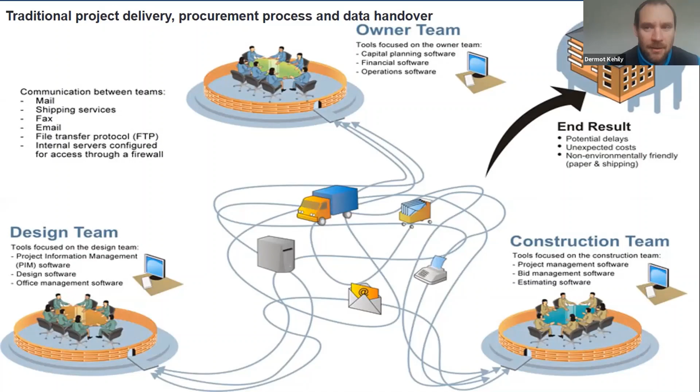So BIM puts a different workflow on that, and I know we talk about BIM as a process. I'm going to focus more on the technology today, but keep in mind that because of all the technologies out there in building information modeling and digitization, there has to be a process that drives it. That could be a topic for another day, in respect to what's possibly coming down the line in Ireland in relation to a level 2 mandate, roadmap, or direction for utilizing BIM in the public sector.

But without the people and the methodology behind it, it really won't be a successful endeavor, it won't be a successful process. So that's for another day - we're going to focus on the 5D aspect of building information modeling, and that is cost, and 4D, of course, being time.

So again, another statistic I like to throw up, even for my students, is looking at the construction industry - and I'm not an economist - from a productivity point of view. I don't know the ins and outs of how these metrics are put together, but from a productivity point of view, and this is a US metric, the construction industry is underperforming compared to other industries. We used to do okay - I suppose what this is saying is that over time, at least since the 1960s, we're not being as competitive as we should be, not as productive or efficient. So whether BIM is the answer to that, I don't know, but it could help.

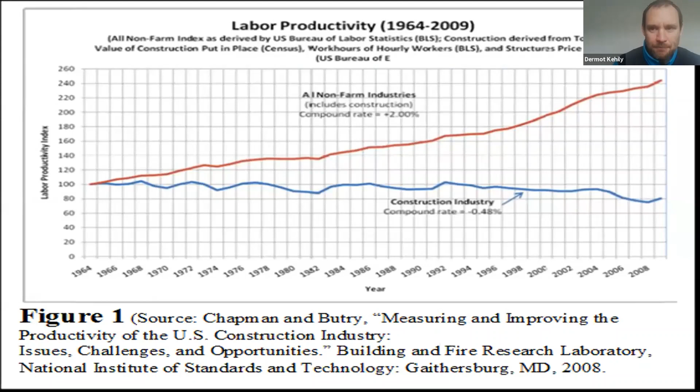We're on the very early tentative stages of it, so we'll see what happens. But it certainly is a more collaborative, inclusive way of working, and the procurement systems in relation to building information modeling will possibly have to change to include that collaborative environment. But again, that's something that will be worked out in due course.

So route into QS, why are we worried about building information modeling? Well, Noel, our chairman in the SCSI BIM QS working group, does a good foreword in the document about why we should be working in BIM, or thinking about BIM, thinking about digitization.

I always ask this question to my students. I do a little poll: do you think in 2 years' time you're going to be measuring from 2D drawings still? I get a certain proportion saying yes or no. Then, do you think in 5 years' time you will? Do you actually think in 10 years' time you're going to be doing what you do right now with your 2D drawings, in terms of either manual takeoff or on-screen takeoff, with all the technology available in the world? And it just depends when.

It's not if anymore, it's when. So I just want you to think about that. That's a big question to answer, but I think it's coming whether we like it or not. Just like you can't argue about climate change anymore - it's just there, the facts and the science are behind it. We're going to have to get on board here. All the other disciplines have. We're just lagging behind a little bit.

I know that's a bit controversial, but all the statistics and research, being an academic, prove that as QSs, we're not as up to speed as the rest of the construction industry and the rest of the disciplines are.

So the document looks at 5D BIM, 4D BIM, pays a little bit more attention to what you actually do with your model from a mapping and processing perspective, and I'll explain that in a second. I did it last year, or last August. I'll go into a little bit more detail, or if you've forgotten, give you a quick reboot on it.

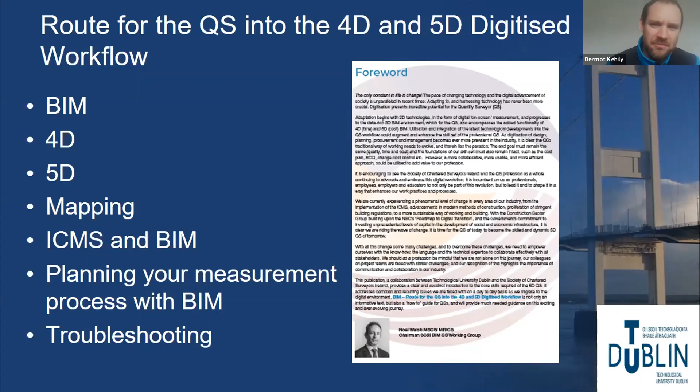Dip your toes in the water, get a model, have a look at it. If you're just using it for visualization purposes, that's a first step. Then maybe when you're a little bit more comfortable with that, do a quick takeoff - the quick automated thing I call a BIM dump, it's my own word but it's a good analogy. Extract the quantity, see what can be used, what can't be used, what you're comfortable with, what you're not comfortable with. Go at your own pace. And that's essentially what this document is all about.

So from a BIM perspective, what do we see, but what is underpinning it all? I don't want to focus too much on this because it could be another number of CPD events. You've got the BIM deliverables and your dimensions, be it thermal analysis, scheduling, cost, time, whatever it is. And then you've got all the requirements underpinning building information modeling - your ISO 19650, your PAS documents, your whole level 2 documentation, CIC protocol, etc. It goes on and on. There's a whole other world of study to be done on that side of things.

But I suppose what we think, or at least what I think you think when you think of BIM, is you're thinking of visualization, maybe more automated quantities, drawings being a little bit more coordinated than they are, you're thinking of hardware, software, training - and that's essentially what I thought probably 10 years ago when I was getting a little bit more interested in this.

Understanding BIM is about understanding information, and that's what it's all about. Don't get put off or sidetracked by how pretty the drawing looks or how pretty the 3D visualization of that particular drawing looks. It's really the information in the drawing, and the information is disseminated in a completely different way than what we're used to in terms of drawings and specifications.

So we can see on the left-hand side here, this would be a CAD drawing of a wall. And realistically, from a CAD perspective, it just points to the actual materials, tells us what they are, and we're quite comfortable with that. And we assign a description to that quantification, and off we go and get our contractors the price. Building information modeling is a whole lot more. It's an object that has a load of information in it. So you can see it visually.

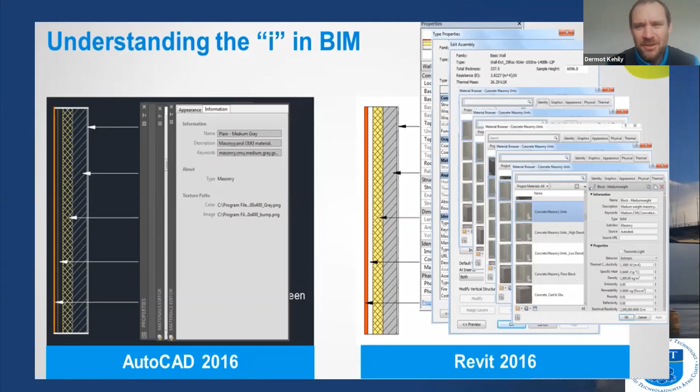So moving on from that, the dimensions, I'll run through these quite quickly because I'm sure they've been dealt with before. 3D is obviously our architectural three-dimensional version of the model. And that would obviously include your structural and your building services information. And from a BIM perspective, that could be the federated model, the composite model, the combination of the design disciplines in one model. Now, at the moment, we're not really there. We're not getting full federated models. We're still getting individual models, if we are getting models at all. But that's what 3D is.

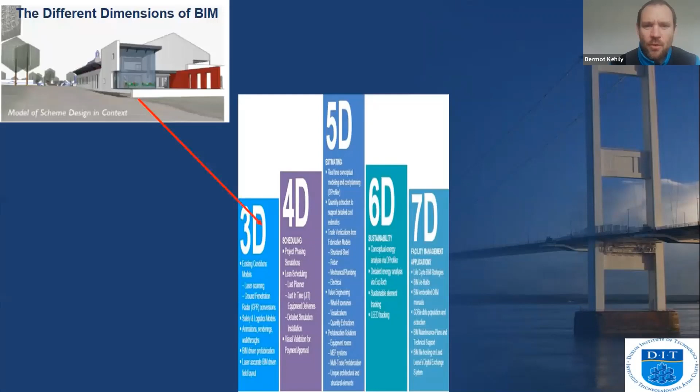4D is the focus on time, and that's a focus on utilizing BIM for space management, scheduling, clash detection. And in fact, that was where it all kind of started in the US. The contractors used to take the 2D information and BIM it up into a 3D model and start finding where the issues are in those drawings. And it was a way for them to work through a lot of change orders and stick in a lot of requests for information in that regard, and possibly make a bit more money on change orders. But from a utilization point of view, I think it's a very powerful part of BIM.

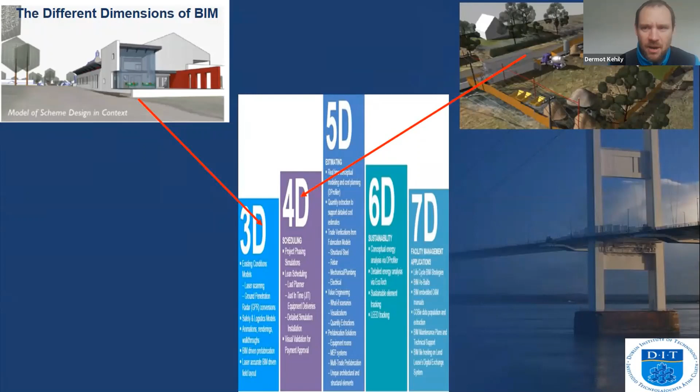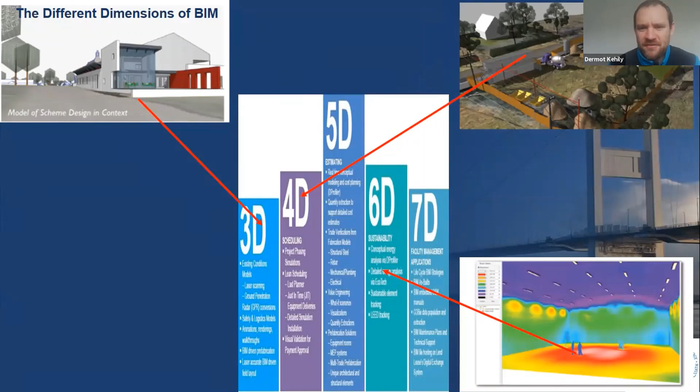The 5D is what we're going to look at today. Sorry, I jumped 5D onto 6D, which is your sustainability, your thermal energy modeling, your energy efficiency. Your 5D, which I'm going to talk about briefly today, and your 7D, which is your life cycle, your operational phase of the building. And that's the real power of building information modeling.

And that's why building information modeling in the UK back in 2010, 2011 was pushed as a tool for public sector procurement, because what the public sector want is essentially an asset information model. They want that digital twin, and they want to utilize it in the operational phase. They don't really worry too much what you do in your design and construction phase. But they want the product of that.

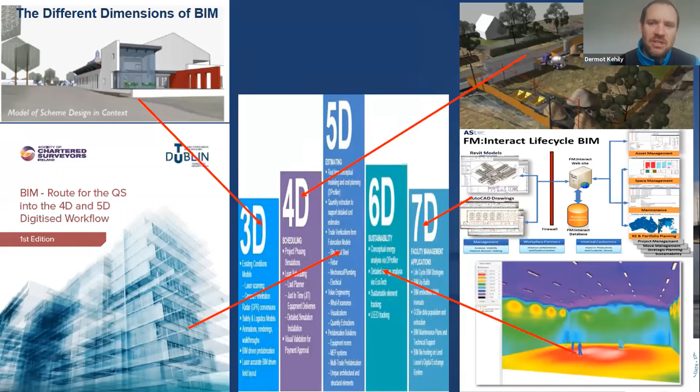What they got before was a bit chaotic, and we can all probably agree on that. A lot of the time, the client walks into that building for the first time and doesn't necessarily get what they want, what they envisaged. But certainly from an asset point of view, they're getting the physical asset and they're getting the digital asset, and they can utilize that much better in terms of operation.

So BIM is a visual database, and from a QS perspective, you'll hear words from me like processing, mapping, coding. So there's new terminology there. There's other words, mining, filtering. And what it means, essentially, we're going about our quantification, our measurement, our cost planning and bills of quantities production in a slightly different way.

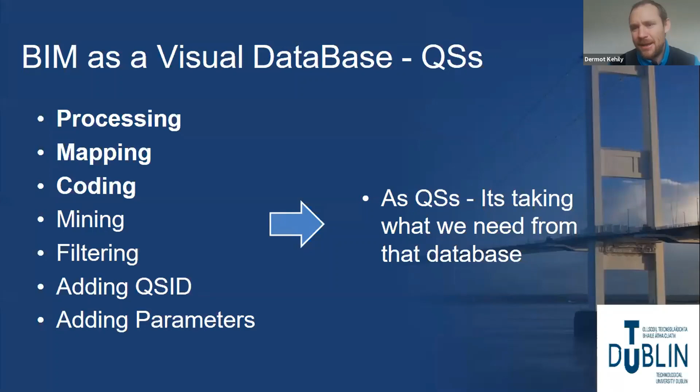It's not about the manufacture of information of quantities. It's about the actual reading of that information that's already there. And it's about being comfortable with it. It's about validating it. And it's about utilizing it in a way that we can present in the same way to our client, be it a cost plan in an NRM format or a bill of quantities in our ARM format.

So what are we doing from a processing mapping perspective? And the document goes through this. We're changing the structure of the model from an output that is in line with the authoring model, the design software. It could be in Revit, and it has the Revit hierarchy structure to it, category, family, and type, into a quantification and a measurement that aligns to our classification systems, be it National Standard Building Elements, the International Construction Measurement Standard, or even ARM4, although it's a bit contentious how applicable ARM, that level of detail, is to building information modeling, but we'll briefly discuss that in a second.

So mapping and processing, again, don't worry too much about this. You'll read it for yourself in the information paper. All I really want to get through today is that processing, from a terminology perspective, is where we maybe utilize, see, I have a QSID and that information there on the right-hand side. So this column of information is supposed to simulate what might be a wall. In this case, a rendered 215 concrete block.

So the wall, of course, visually you'll see it in the model, but from an object point of view, from a data point of view, you'll see a lot more information than I'm showing on the right-hand side of your screen there. And in that information could be a QSID. Now, who's going to put that in there? I always get that from colleagues of mine or friends I went to college with. I'm not going into the architectural software and sticking in a code so that I can take off my quantity. That'll take me forever. And plus, I'm not paying Autodesk a license to just do that one thing. Well, you can do it in what is pre-processing.

You do it in the model, and it's worth having a somewhat working knowledge of ArchiCAD or Revit, but it's not needed. You can still do it in your cost software. So be it in your Cubit, or your CostX, or you're utilizing BIM Vision or QB or whatever your software is, you can actually do your filtering there. Or you don't have to do it at all. You can output your quantities automatically and see what you can use in your traditional way of producing cost plans and bills of quantities. So just be familiar with those two concepts.

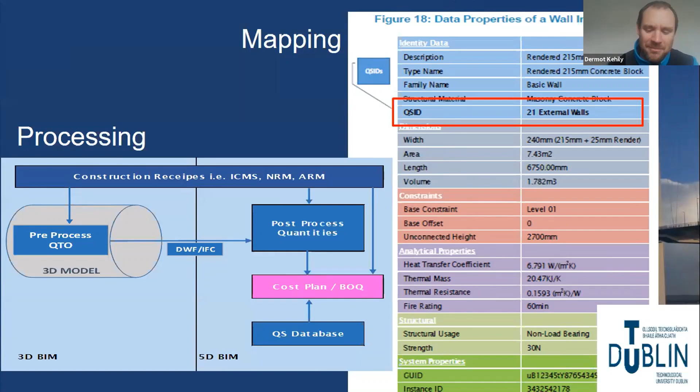The documentation explains processing and mapping. Processing being the coding part, and then mapping is changing it into what we need from a National Standard Building Elements perspective. So we can do it a number of different ways, and I wrote this part of the document myself. I tried to explain it very simply to the layperson, as an old supervisor of mine used to say, so the intellectual 14-year-old can understand it. That's the focus here, to make it simple and not technology orientated. So I'm not saying use CostX, use Cubit, use this particular software. I'm saying that they all have similarities in the way they do these things. That's quite different to what you're used to in terms of on-screen measurement.

So I go back to what I was saying earlier about this BIM dump. There is some software, and CostX is one of those, where you can actually press that BIM red button and out pops a load of quantities. It'll quantify the entire model, but only what's in the model. So if it's an early model, there won't be a whole lot. If it's a detailed model, it'll be quite a bit. And a lot of those quantities are very usable, especially counts and areas and wall areas, etc. But you just have to be careful using it verbatim in your quantification.

And what it does is it quantifies, and you can see here on the right-hand side, it'll take the hierarchy structure of the Revit model it's coming out of, or an IFC model, which is an interoperable file, and it'll quantify based on that schema, that structure, not any sort of National Standard Building Elements or ICMS structure. Now, that structure is devised in such a way that is quite similar to our elemental structure. So just be aware of that. This can be very beneficial, just pressing that BIM red button and seeing what you get out.

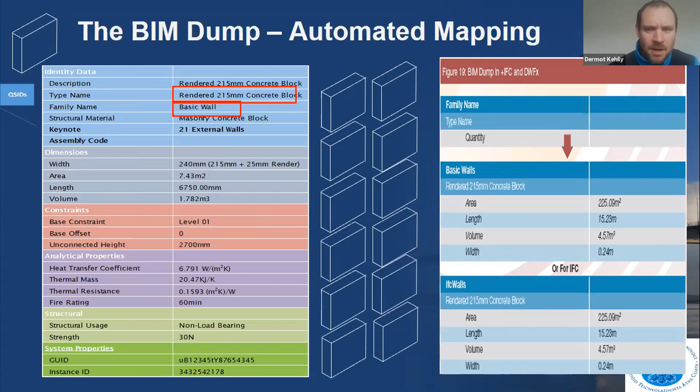Now, not all software can do that. And that would be the start of your BIM process, I think, whereby if you have software that can do that, do it. See what quantities come out, especially your counts, your M&E stuff, your light bulb counts, your door counts, your sanitary fittings counts. Huge advantages in a big model, a big building, just pressing the button and getting those counts.

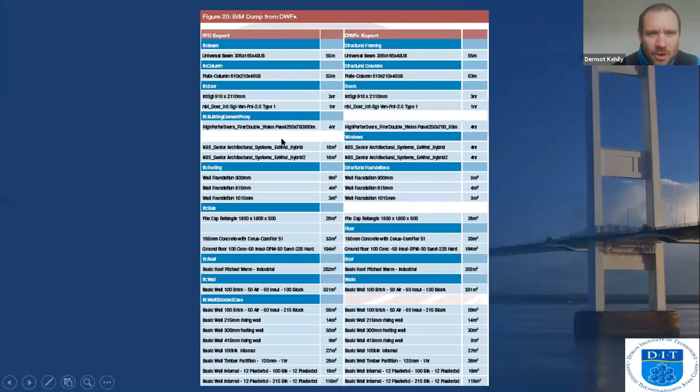Okay, so you can see, maybe you can't, it's pretty blurry, and apologies for that, it's a pretty blurry drawing. On the left-hand side is an export from IFC. That's the open BIM format. Again, I know this terminology might be a bit new to you guys. Have a look at the document that explains what they are. It's an automated export from IFC on the left-hand side.

On the right-hand side, it's an automated export from DWFX, which is the interoperable file from Autodesk. Now, it's mainly used for collaboration across Autodesk products, going from Revit to Navisworks, or Revit to Revit Structure, etc. Whereas the IFC is your pure BIM interoperable file. Supposedly, no matter what software you're working in, if you get an IFC file, you should be able to open that file. It's like a PDF. It's a read-only BIM file format.

And you'll notice that they're quite similar. So if you're working in CubiT, you'll be working on IFC. If you're working in CostX, you'll be able to use DWFX and IFC files. If you're working in BIM Vision, it's IFC files, and most other software, it's the IFC, and the IFC is the future. So just be aware of that.

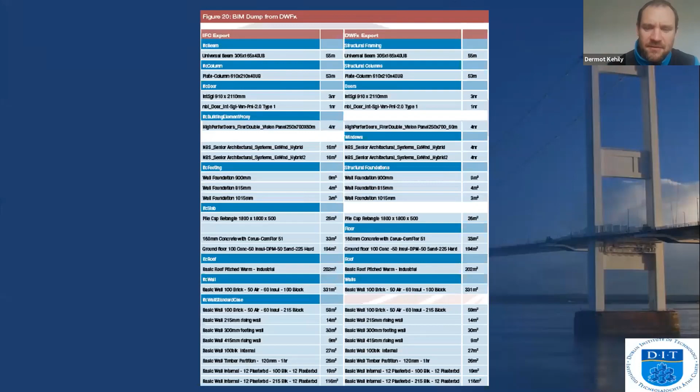From an automation point of view, from a quantity point of view, getting into a little bit more detail, I'll leave it up to you guys to take those steps when the time comes. But you will have the ability to do this mapping. So you might say, I'm going to use the BIM database to say folder name is going to be based on my QSID, and that could be my element 21 external walls. The subfolder name is going to be based on the family name of my Revit object. And then I'm going to combine the description of type name and structural material together to give me a description.

And what happens then is you get a more formulated output. Now, this takes a bit of a progressive step into building information modeling from a quantification point of view, and it's kind of hard to explain in one slide. But if you're taking anything from this presentation in this regard, it gives you the manipulability in the software. And again, most software has a mapping functionality. CubiT has it, CostX has it, and others have it. So it doesn't matter what you have, you'll still be able to take this step.

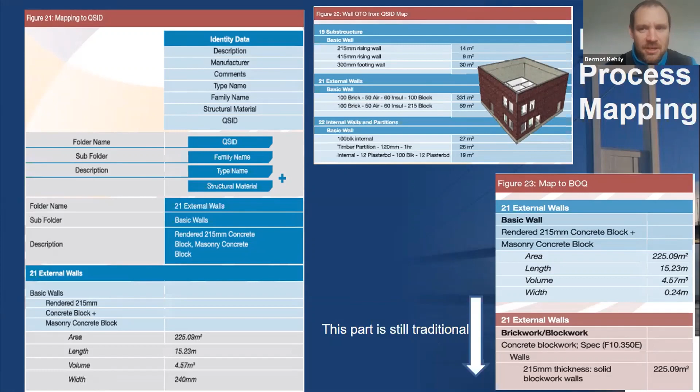And all that doesn't give you an automated quantification that you can utilize straight away in your cost plan. But what it does is it prepares you and gives you a breakdown per the National Standard Building Elements. So then it makes it a lot easier to put it into your traditional cost plan. Now that last part of the process is still quite manual, but the early part in terms of quantification is becoming more automated. We're still on a hybrid approach. You still won't be able to get away from measuring your gross floor area and possibly doing a lot of 2D takeoff, because our measurement rules are still based around that criteria. But just be aware that there are ways of automating your quantities quite quickly.

If the volume dimension isn't there, or I want to check it when it is there, I can multiply length by width by height to see whether it's aligning. Or I can calculate my formwork based on the perimeter of my column times my height. And again, that formwork quantity wouldn't be there. So these are model-derived quantities.

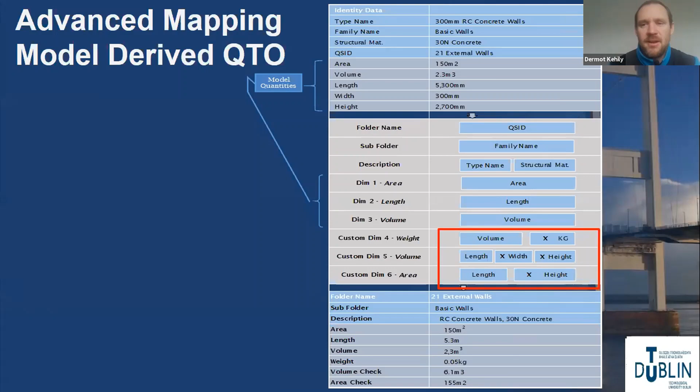Everything isn't going to be in the model, just like everything's not in the drawing, and I have to derive these quantities from a 2D drawing. It's just a different way of doing it. So that's the last stage of really getting into automated mapping. And again, take your incremental steps in that regard, and that might be down the line for you guys. Or if you're already doing automated takeoff from the BIM red button, so to speak, this may be the next step for you.

Rory's not here. Unfortunately, he couldn't make it. Rory was the author that looked at 4D, and it's beyond my expertise, a little bit, in that regard, and maybe that's saying something for a quantity surveyor. Not necessarily focusing on having expertise in scheduling, the link between the schedule and the cost, but that's essentially what 4D does. Looking at constructability, looking at space management, and maybe those of you that are contractors, QSs, have more expertise in that regard. But it's a very powerful tool.

As I said before, that's where it started. That's the roots of building information modeling, at least in the US, when the contractors started realizing, well, it doesn't matter what the design team do. In design and build procurement, I can design this up in detailed design and start utilizing the model for efficiency purposes in relation to its constructability, its scheduling, its cost, its time.

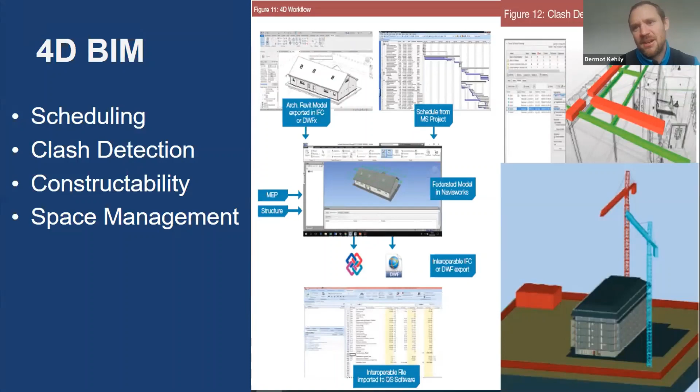There's a section on BIM and the ICMS. Again, I don't have a huge amount of time, but what I want you to get from that is that the ICMS is a codable document. It's a little bit easier than our national standard building elements to utilize in building information modeling. It would be nice, and this may be coming down the line, if all the objects in a model had already embedded ICMS code. If that's the case, filtering becomes a whole lot easier, and we don't have to do a whole lot of processing. We just filter the way we want the model to come out in terms of level 1, level 2 or level 3 ICMS codes, and out pops our quantification based on that structure.

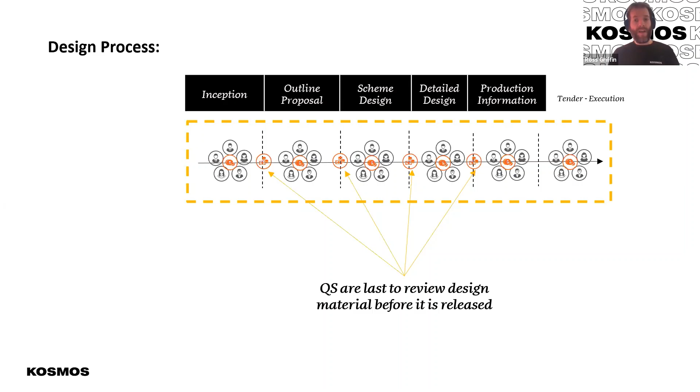And of course, the QS, in order for this to happen, should be in the middle of this process as the design is developing. So where cost plans are created and design estimates are created while the design is developing, not waiting to the very end once the design is complete at each stage, and then taking on the documentation and information to generate our output.

It is far more productive and value-driven if we're involved and building it the same way the architects build the design, the same way the engineers build the design. We sit with them and build our cost plans and cost estimates.

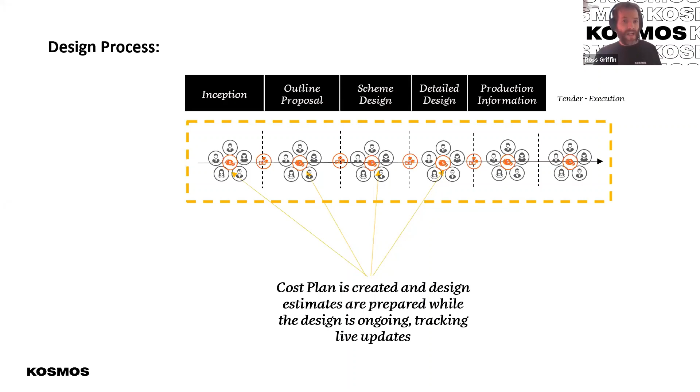Of course, we have a budget to work to, but if we're involved in the conversation, we can guide the architects and engineers' solutions before they actually spend a lot of hours and a lot of time on it. And that's a huge amount of value for the different stakeholders. Thanks, Elia.

So the digital QS in a BIM world, and the digital QS is a term we coined back in 2019. What we're saying is that the digital QS, without integrated collaboration, cannot succeed. We will never get the information we need from the design teams if we're not sitting with them and working with them. We can take information from the modeling, but it's much more difficult and time consuming to take a 3D model cold and try to work with it. It's far more productive developing the model with the design teams through the process.

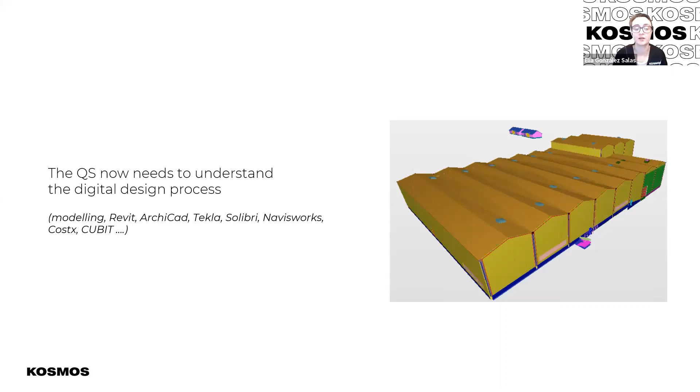Exactly, Ross, and I think that's something Dermot mentioned. Are we going to do the same thing in 5 years' time, in 10 years' time? The fact is that our profession or skill has to adjust to that. We are not going to limit our profession to measuring, estimating, and relying on what we receive, but now we need to learn how the design process works. We need to learn how to handle and manage the data we are receiving. To do that, we cannot rely on them to produce it—we actually have to do the input for them to assure that information will be there.

And that's key, I think—our role is now changing. We've become data managers and data analysts as opposed to traditional quantity surveyors doing quantity takeoff. So what we're currently doing is moving into a quality role as opposed to a quantitative role, where we are embedding ourselves in the design process to make sure quality is there for our client, to protect their interests in terms of budget, scope, and delivery. I think that is key here.

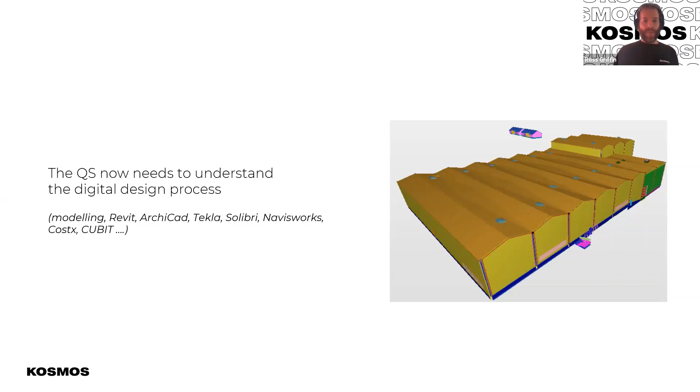Likewise, these illustrations show that different design disciplines produce different information, and we need to understand that each discipline operates and works differently. But Ilya, I think you have the next few slides.

Essentially we are becoming more involved in the design process. That means we also need to be reading information at different stages. We are no longer just receiving something that is produced, but actually collaborating with them to edit that. So whenever we have different disciplines, we potentially will also be working with different software.

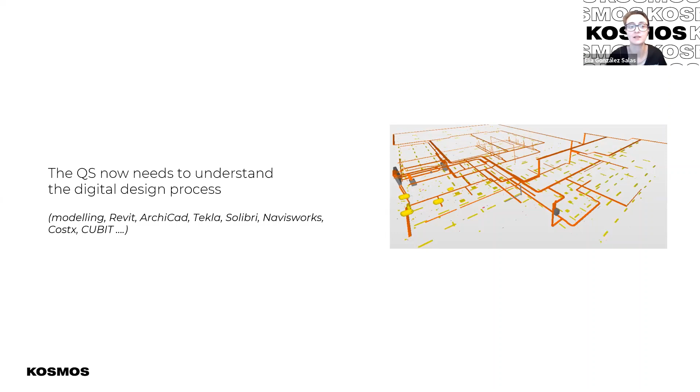Everybody mentions Revit as the tool for generating, but the reality is there isn't one tool that fits all disciplines and types of design. All of it is produced in totally different software. I haven't even opened Tekla, but it's probably the most common software for producing structural drawings, or ArchiCAD for landscaping, etc. So we're not really working with the software itself—we're working with the design team, telling them what we expect to receive from each of them.

This means we are more aware of what they're producing and what level of detail we're going to receive at different stages of the design process. Just a note on that, Ilya, on the level of detail—at different stages of the project lifecycle, different disciplines produce different levels of detail. So at LOD 100, which is just geometric, you get very little from the MEP disciplines. It's generally architecture and construction, and that needs to be understood.

What information we expect to receive at different stages allows us to plan how we build our cost estimates and cost plans based on that information. And while it's more or less standardized in all design processes—

It actually varies by type of building. For instance, if it's a more architectural building like a school or office, potentially what comes first is higher detail on architectural, because that's the discipline driving the output of the building, its functionality, etc. Whereas if you're looking at a facility for installations, like a data center, where the main function is installations, that's what comes first—so they get an awareness of volumes, and then architectural is secondary and comes after, just to do the enclosure, correct?

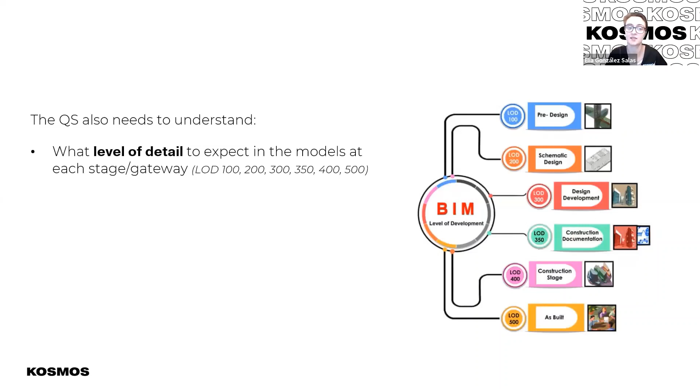So this is something quantity surveyors didn't need to know before, and we didn't care because we were just receiving the information that was there. But now we need to be aware of this because our delivery is going to depend directly on these types of concepts. And all of this will be identified in the BIM execution plan, which is very vital for QSs to also get involved in.

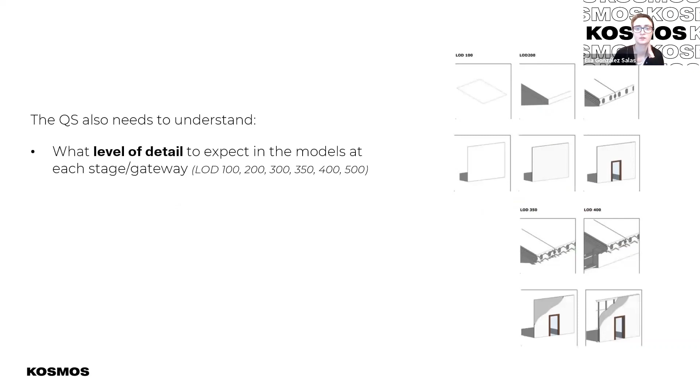I think we lost you, Ross, there, but I'll just continue talking on your behalf.

The BIM execution plan, which is produced as part of the initial contractual documents, is probably produced even before the design team gets on board on a competition, because it's prepared by the consultants.

That's a key document that is going to drive the level of detail, the information content in the different deliveries for the different disciplines, and the information that we need to work with.

So it's essential, if you have the chance, or if you're a consultant, to have a special eye on that and make it work for the quantity surveyors that are going to use that documentation later.

Dermot was mentioning before, this is only a peak of all the information and data you can get from the models, and that is true.

We get so much information, and that's not necessarily useful for us if it hasn't been produced properly, like sheet in, sheet out, right? The document that is going to prevent that from happening is your BIM execution plan.

And that's going to drive basically the quality and the content of all your deliveries across the different stages of the project. Just going to speed up here.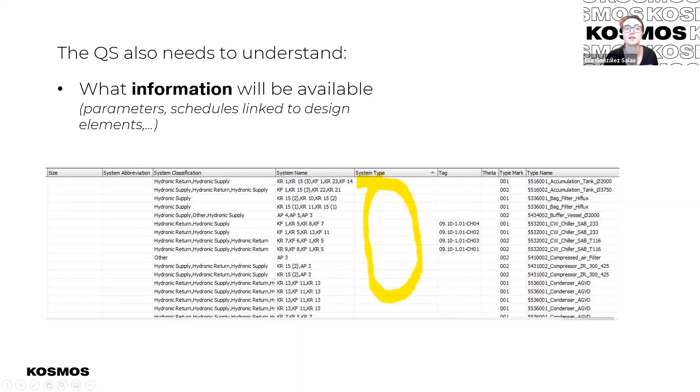Regarding the information, all the parameters, as you can see, we receive a lot of information that I don't even need to know. But I was missing the system type in this specific project, meaning that essentially the main key of information that I needed to use to split all my systems was missing.

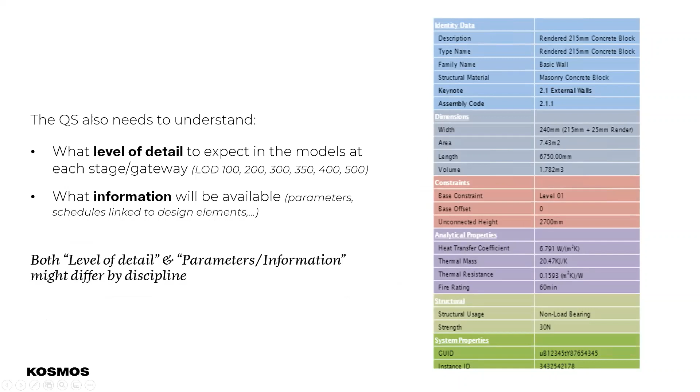And the only way to prevent that is not to rely on what you are receiving, it's actually to collaborate with the designers. Don't blame them for bad quality of it. Essentially, they don't know what you need, so they need that hand to guide them, right?

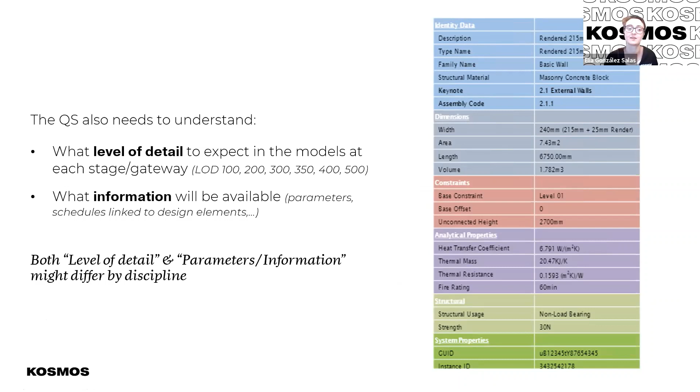And they appreciate it a lot to know what you actually need, and it's not that much work for them to work with that.

Basically, when producing or when working with all this information received from BIM, we produce different types of deliveries. These different types of deliveries, in this case, are linked directly to the model.

We try to have that as a live connection, so that whenever the design team is updating something, we can quickly update our estimate.

We start building a cost plan with very low detail, depending on the information that is in the models and depending on what the BIM execution plan has defined for that delivery.

And then we extend that estimate and that cost plan with the additional information that we are receiving, not necessarily at the end of the phase, but it can also help to update it periodically as soon as information is available. So you don't wait till the very end, you have live updates of your estimate, ongoing.

And just to comment there, when it's linked to the models, that is linked to the models we use. So we use a software, CostX. You're familiar with that. It's just a software that we use, but we import the IFC, so it's not directly linked to the architect and engineer's models.

It is our own. So we update on a weekly or monthly basis, depending on the stage of the project.

Yeah, all softwares do this, and it is actually a good point there, Ross. All softwares do that as per today, I would say.

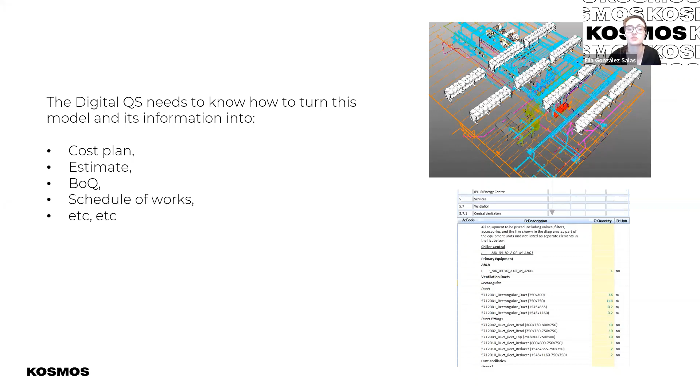So whenever the architect uploads their design so that the structural discipline can update their model as per that, we, as cost discipline, update our cost as well. It becomes a more involved process rather than being totally disconnected at the very end of the phases.

As I was saying, there is a possibility to update your estimate on the go, as well as actually focusing on what has changed from the previous design in a quick way.

So you can benefit from this even if you are only using BIM for visualizations, right? You can actually overlap the different versions and get an understanding of what has changed since last time you looked at that, and then you can ignore everything else and focus on what has changed.

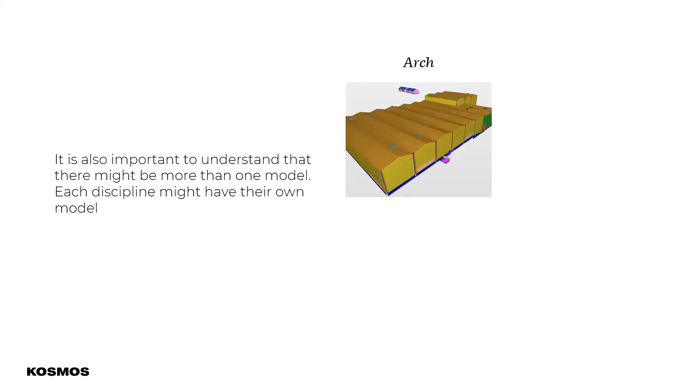That's an important tool for the design disciplines when talking about impact of change. From a design disciplines perspective, they might not feel they've made that much change.

But actually once you visualize it within the 3D models, you can see quite a big impact in terms of what the cost manager needs to do and how they work with the information.

So those previous models show quite a lot of change, even though the disciplines say, well, we didn't make that many changes. But actually you did, and that has a cost impact and time impact, of course.

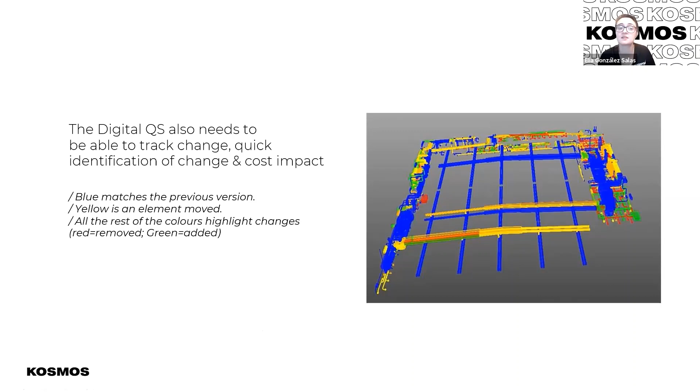So for us as a quantity surveying company, it's very interesting to visualize. When we are having discussions with our clients and they say there's been very little update since last time, can you quickly update the estimate? We show them this. It wasn't that small as you believed, right? Blue is what has been unaltered, but all the rest of the colors is something we need to look at, either for price, quantity, or update. So even though it's a good tool for quick update, it still requires time, and a quick estimate is not 1 hour potentially. It might be a little more, and it helps us discuss with our clients to agree on the scope of the task.

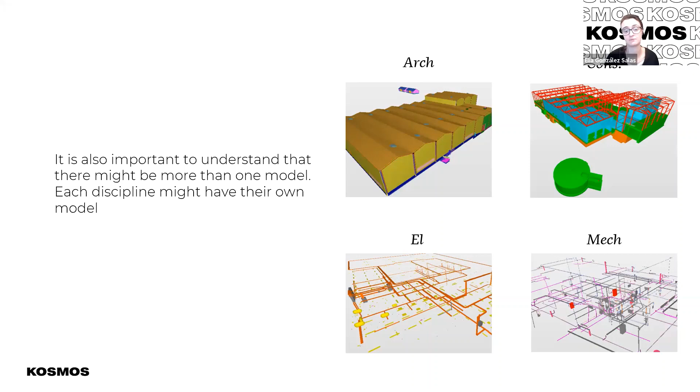Every different discipline is going to have their own model. In basic projects, we may have 8, 9, 10 different disciplines: landscaping, fire, acoustics, utility. So that means we're processing a lot of information, a lot of volume, and we are able to do these updates in a week's time for all the disciplines in a team of 2 or 3 people. This is something we could not have achieved without the power of digitalization at this stage. We can work much faster on these small or repetitive tasks that can be automated, so we can focus on bringing value, focusing on what has changed and why, and how we can find better alternatives to bring the project on budget.

It also helps our clients so they don't design too far out of budget, but can catch whenever there is a deviation from target before the design team spends a lot of hours. Just think that for us, it's 3 hours of a QS bringing value. But for the design team, if there are 10 different disciplines designing towards an option that's actually not on budget, it might be hundreds of hours in just 3 days. So it's something our clients appreciate quite a lot.

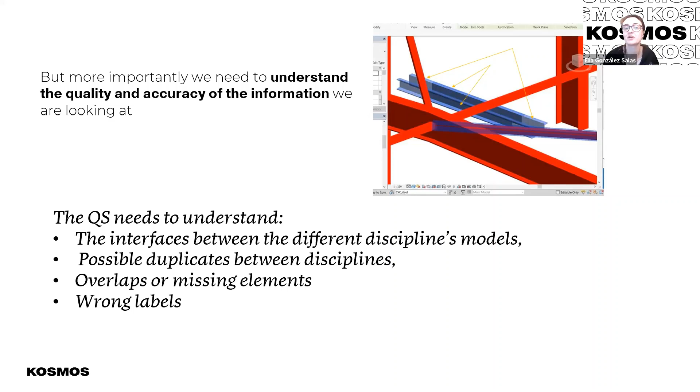Going back to the topic, it's important to understand the quality and accuracy, because we are working on the go. We don't always get the fully qualified versions, and that's where we as QSs need to change our mindset a little, and also help the team, since we are more involved now and not disconnected, to pick up on these things. We are essentially the first ones to see the design they're producing before the client and the contractor. So we're also catching a lot of these overlaps and wrong labels, etc., that we've tried to list and pick all of them in the document published today. So even if you're not working with it, it will give you an overview of what to focus on and look at whenever you start getting more involved with digital delivery and digital material.

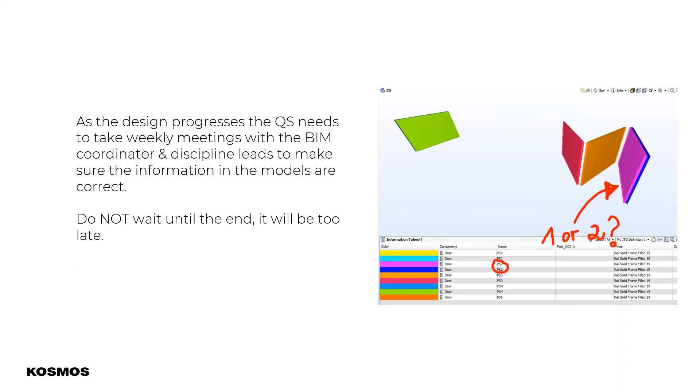I suppose a new aspect here is that we're now part of the design team. We're there to support the design team in their deliverables, to add value to the design information and embed ourselves in that, identifying errors within the design information, then notifying the architect and engineers during the process that there's something amiss. What exactly is happening? There seems to be 2 doors here, one behind the other. Is that an error, or have we got some kind of new strange design on double doors?

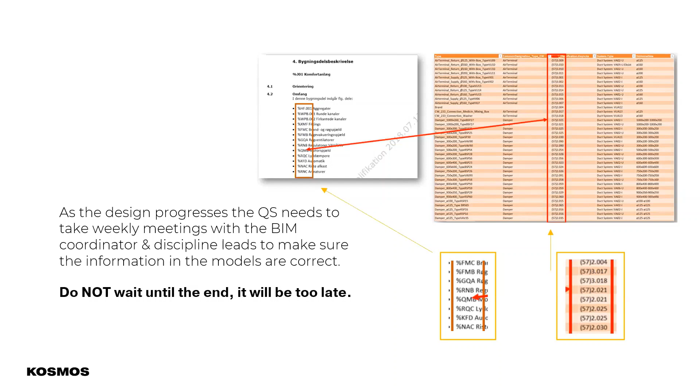Something we've realized after experience is that even though we believed we were disconnected from the process, the reality is that inside the design team, there are also different sub-disciplines, if you want to call them that. There's the person who designs, the discipline lead who attends the meetings, and then there's a person who does the details, and a person who does the descriptions.

This team, we believe they are coordinated, but the reality, and you guys have probably experienced it if you are in the contractor and you are receiving the documents, is they are not necessarily, because a lot of things happen at the end, and it's complicated to coordinate them, and it's just bad quality. But

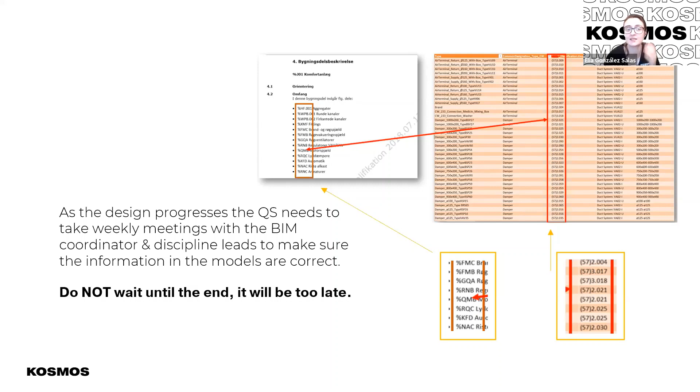as Ross was saying before, in this triangle right now, because everybody is getting fed information from the design, we are able to catch these connections and work all together to make the link between the different documentation that is produced, thanks to that coding system, the reference system. Yeah. We have to jump on.

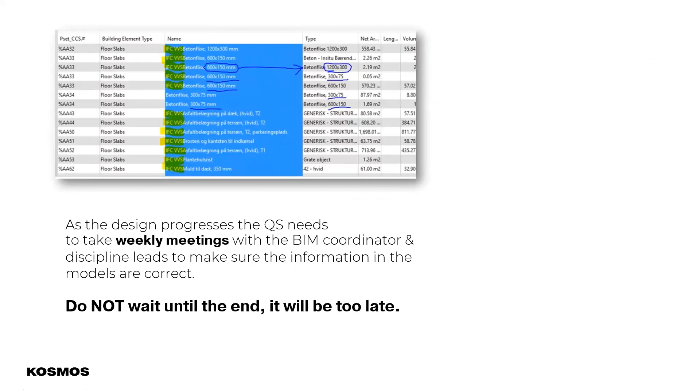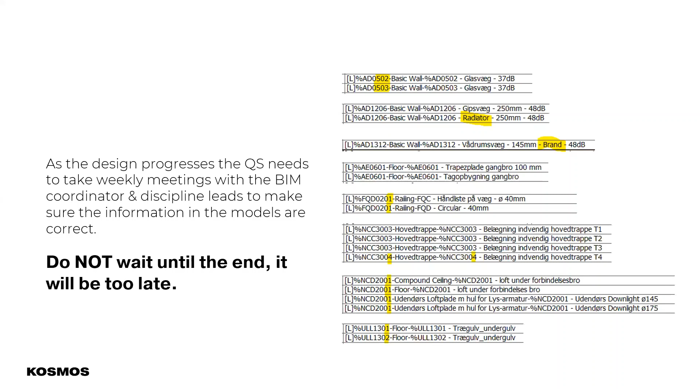We've 10 minutes left. This is more examples of where we can pick out issues and discrepancies and accuracy in the design information specification. Yeah. Dermot was mentioning before, if you only use the models for visualization, that's the first step. That's how I started. That's how it helped me to understand the level of quality of the models, and also if there were errors, or if I was pricing something incorrectly, not relying necessarily on this dump output and getting all the quantities with a pivot table in Excel.

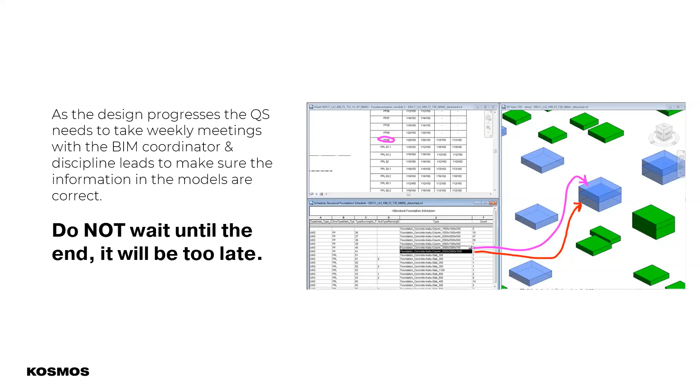That's how I started. But actually looking at the geometries and getting more accurate on the pricing and the quantification that I was reading, not limiting myself to a pivot table. Just more examples, some elements that might be wrong. We don't need everything to be on the model. We can essentially take care of duplicates, but also take care of things that we don't need to have, but we can derive those elements and these quantities.

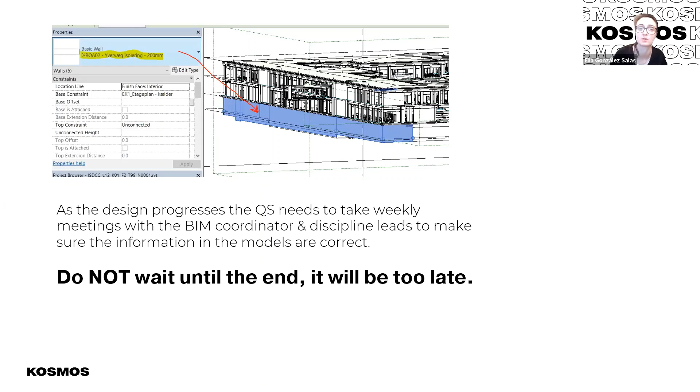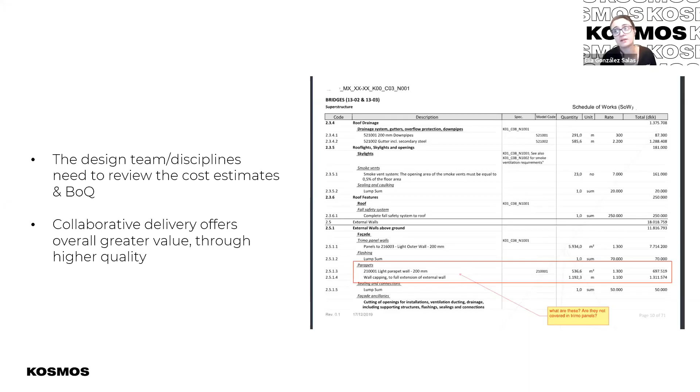And I don't know if you have noticed, we are repeating the same sentence in every single slide. Do not wait until the end. It will be too late, and these things can be solved by collaborating with the design team and getting them sorted. They need to be done sooner or later, so the sooner they are, the better for everybody. This is more examples, I believe, of different benefits of collaborating with the team. I'm going to pass them, Ross, if that's okay with you. The document will be sent out anyway by Michelle and the SCSI, so you can have a read through it

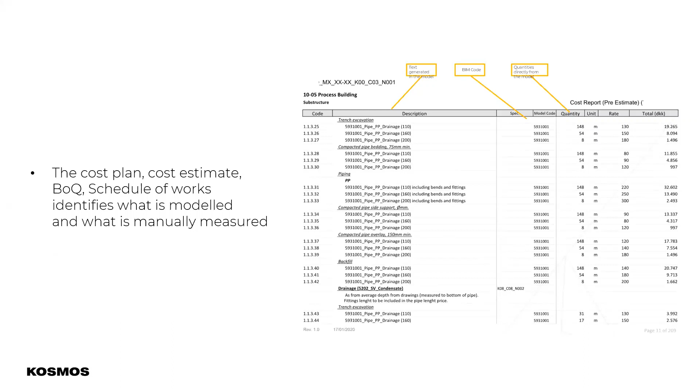if you want. So really, I think our message here is that if we want to really get involved in BIM as QSs, we need to get involved in the process. We need to be at the table, we need to be sitting with the teams, and we need to be having these discussions on collaborative, integrated deliveries. Otherwise, we will never get the true value, and our clients will never get the true value from this digital process. Automation, of course, will improve how we prepare cost plans and cost estimates. And we as QSs, as I mentioned before, create the value, but we also create the link between modeled information, specifications, quantification, and effectively price, and that's where we sit.

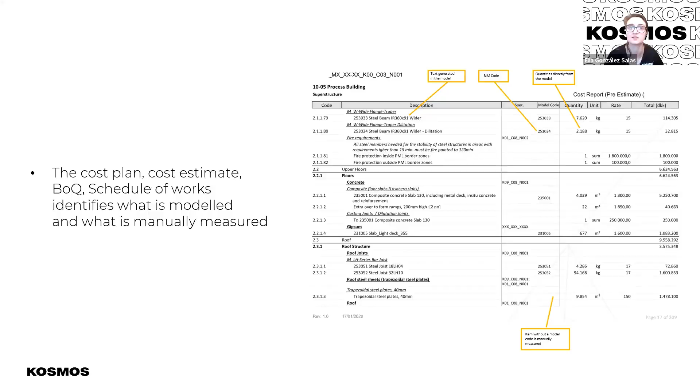Some examples here of automation that we have implemented. Yeah, I will just mention quickly here. Obviously not everything is on the model, and it's not ever going to be. It doesn't need to be: logistics and elements that are probably not designed. So that's where, of course, we still need to keep them. We cannot rely on the information we are receiving and price only that. We also need to essentially understand the project, add additional costs whenever there is need, or manually measure from the details if those elements are not part of the 3D models, just the details on the sections. And the conclusion here, value-driven cost management, integrated and collaborative.

That has to be key. And the QS needs to understand the 3D process. We need to have an appreciation for the architects' and engineers' process of design so that we can complement it and complement their output in terms of quality. Regular communication, as I say, sitting at the table, having these discussions and assisting in our delivery will add value. And do not wait until the end. Get involved, as our slide said there. At the end is too late, because it will cost too much to improve and go back and redesign. And quality is everybody's responsibility, not just the architects and engineers.